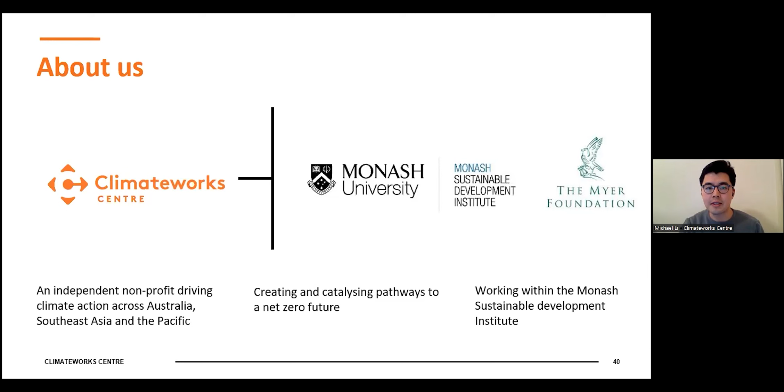Over the next half hour or so, I'll cover a discussion focused on the proposed changes to the National Construction Code for 2022, which will be announced and come into effect this year. We'll start with a discussion on why energy efficiency is important for buildings, an introduction to what the National Construction Code actually is, and what changes are being proposed for this year.

We'll also look at some of the research that we and Renew, and others, have shown about the impacts and benefits of introducing these changes to the National Construction Code for homeowners, and also what the impact is if these changes aren't adopted. Finally, I'm going to conclude with a discussion around the future aim for a zero emissions building code.

It's important to note that we will be covering the benefits and impacts from a householder perspective, because that's really what our research is focused on. The research I'll be presenting by Climateworks, as Graham mentioned, was completed in partnership with ASBEC, the Australian Sustainable Built Environment Council, and supported by their industry members. So it's a piece of research that has pretty widespread support in its development and presentation moving forwards.

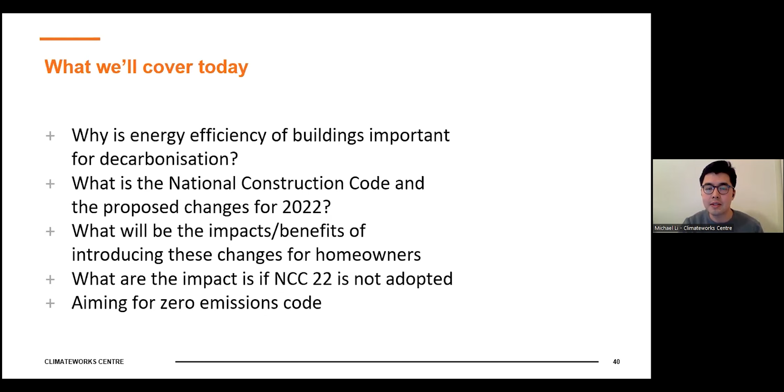So first of all, why are we even talking about buildings and decarbonisation? I'm sure it's not news to many of you on this call that buildings make a major contribution to both emissions and electricity consumption. Our research shows that buildings make up around a fifth to a quarter of Australia's national emissions. And in Australia, the building stock we have, particularly residential buildings, is pretty notorious for having some of the poorest quality energy performance in the developed world, especially when it comes to housing.

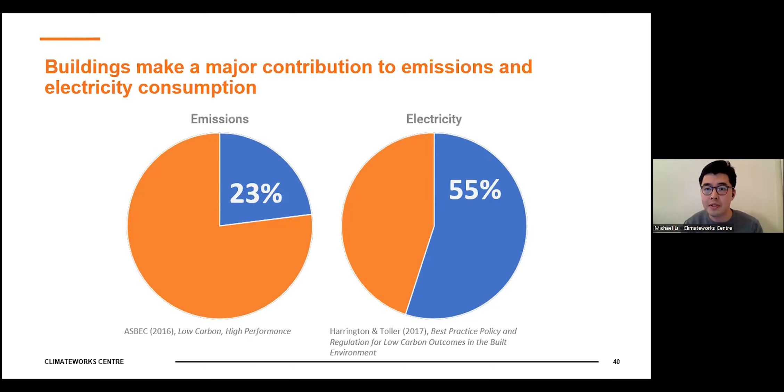Some examples of this include a study that Sustainability Victoria did a few years back, which showed that the average energy performance for houses built before 2005, before energy standards were introduced, was around 1.8 stars out of the maximum 10 stars available in the NatHERS rating scheme. For comparison, the current minimum standard for new housing construction is 6 stars. So there's a pretty big gap between what existed before the code, at 1.8 stars, and what's being built today at that 6-star level.

Even though this survey had some limitations, being based on a small selection and where the properties were located in Victoria, it does show that there is, based on this sample, a gap between existing homes and new homes being built in Victoria, where I'm based, but also across Australia.

When we look globally, the International Energy Agency did some analysis on energy efficiency for housing and found that during the period between 2000 and 2016, Australia was ranked 23rd in the improvement in energy efficiency for housing out of the 28 countries reviewed in that study.

On top of all that, as Graham mentioned, the energy standards for housing in the National Construction Code in Australia haven't been strengthened in over a decade. So not only are we falling behind our international peers, and not only are we starting from a pretty poor quality building stock, but regulation hasn't changed for a long time to allow Australian housing to catch up.

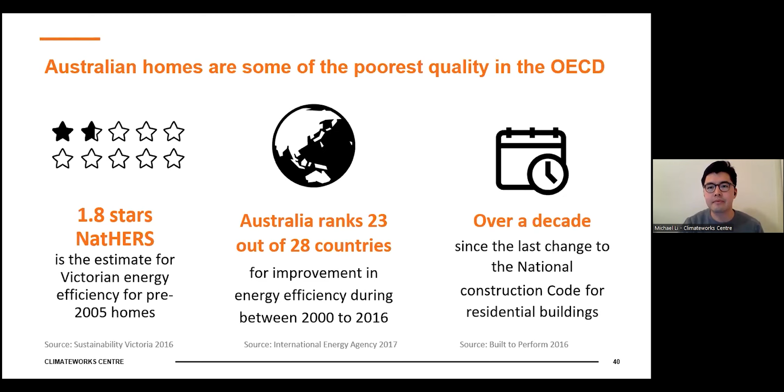What our research shows, and other people's research shows as well, is that many of the technologies and the practices required to reduce carbon emissions in buildings already exist and are readily available today.

It's commonly acknowledged that there are three very broad main ways to reduce carbon emissions from buildings. First is to improve energy efficiency, to reduce the energy being used in the first place. The second is to switch any non-electrical power sources and power demand to electricity, particularly from gas. And then finally is to produce and store energy on site at the property.

This can be achieved by a whole range of existing technologies and practices. Some of those are listed on the right-hand side of that slide there, and many of which I'm sure this audience is pretty familiar with.

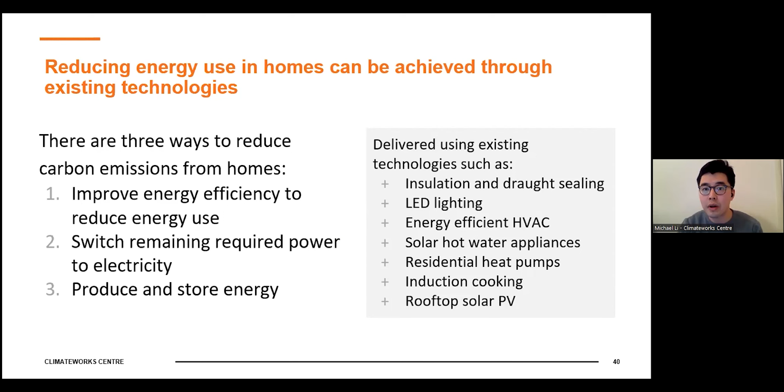But even though our research shows that these technologies and practices are available, the main challenge is how do we actually achieve widespread deployment of these practices over a very short period of time?

I'm sure you've heard in the news recently, but also over the last 6 months, that there's great urgency for the global community to reduce emissions in line with keeping global warming below 1.5 degrees above pre-industrial levels. Back in 2020, Climateworks released a report called Decarbonisation Futures, which calculated the changes in Australia's economy that need to happen by 2030

to keep climate change in line with that 1.5 degree target. So what our research showed is that under the 1.5 degree aligned scenario that we modeled, rooftop solar power generation doubled by 2030 compared to today's levels.

But it's important to note that the decarbonisation of the building stock isn't just about solar panels. Even in our scenarios where the electricity grid is powered by up to 79% renewable energy by 2030, so that's a pretty ambitious increase in renewable energy in the electricity grid, the energy performance or energy efficiency of housing would still need to improve by almost 50% by 2030 compared to today.

And in commercial buildings, that would need to improve by around 28%. Not only does the energy performance need to improve on top of the renewable energy expansion, but our scenarios also included a fairly significant amount of electrification.

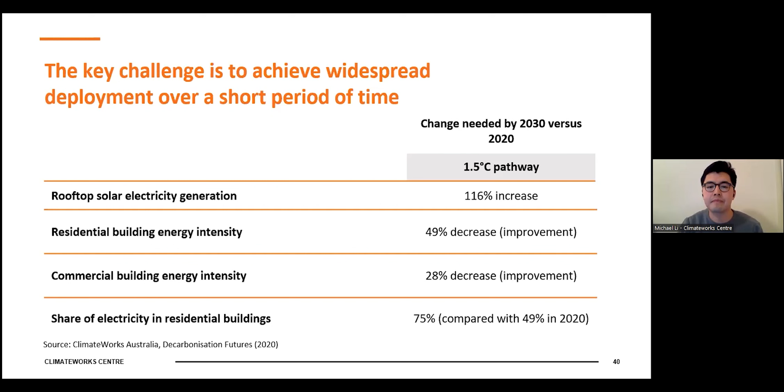So what does that look like when you break it down into different parts of our building stock? Well, if we focus on housing in particular, for new housing, our scenario that aligns with that 1.5 degree target includes an improvement in energy performance for new housing of between 51 and 56% compared to housing being built today. So what that suggests is that housing would need to be built significantly above today's minimum standards.

And then also for existing buildings, an improvement in energy performance of 41 to 44% compared to today's standards, compared to the building stock that we have today. So what that suggests is that not only do we need to be building more efficient new buildings, but we also need to rapidly accelerate the rate at which we retrofit our existing housing for better energy efficiency.

So really what that shows us is, what we know is Australia has targeted net zero emissions by 2050, a target announced late last year. But that target can't be achieved without a focus on both retrofitting existing buildings and a continued commitment to deliver more efficient new builds.

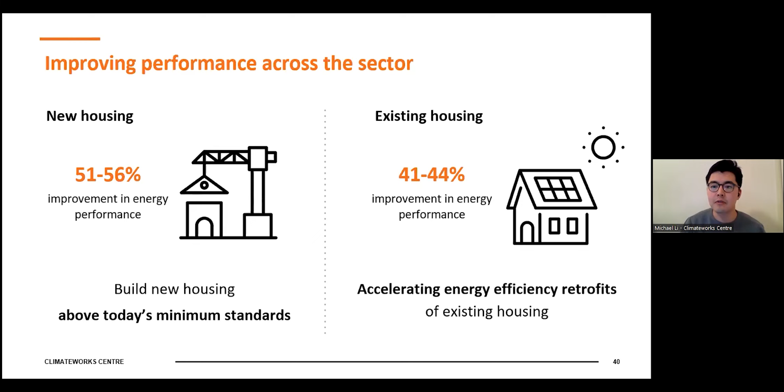And so this presentation will very much focus on new builds, and in particular, a regulatory policy, a regulation called the National Construction Code.

So new buildings and the performance of new buildings is really important for decarbonisation of housing and the building stock, because new construction does add up fast. We estimated that by 2050, about half of Australia's buildings that will be standing at that point haven't actually been built yet. So even though every year the proportion of new builds is quite small compared to the total building stock, that does add up over time.

The good news is that there is a ready-made regulatory mechanism for new buildings that governs the energy efficiency, performance, and minimum regulatory requirements for all new housing, which is the National Construction Code.

Back in 2019, the Council of Australian Government's Energy Council, essentially a group of all the energy ministers around Australia at the state, territory, and national level, agreed to a policy called the Trajectory for Low Energy Buildings, a national plan that sets a trajectory towards zero energy and carbon ready buildings for Australia. The plan recommended first setting a trajectory towards zero energy and carbon ready buildings, and secondly implementing cost-effective increases to the energy efficiency requirements in the National Construction Code starting from 2022, noting the policy was approved and published in 2019.

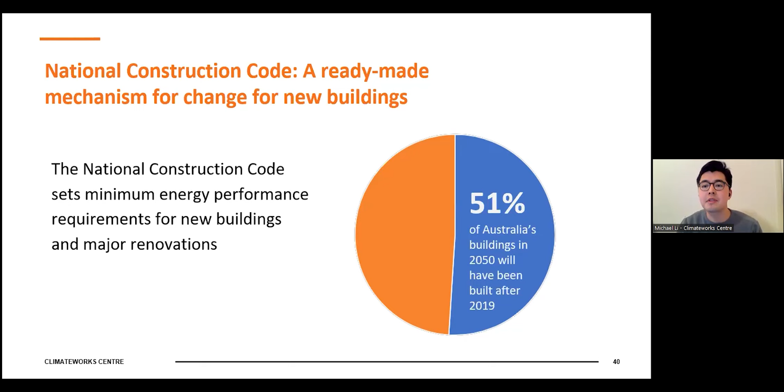Finally, to continue to focus on existing buildings, as I flagged before. The wording in that policy is an agreement to substantially update the minimum requirements in the National Construction Code from 2022, where it's cost effective.

One of the reasons why the National Construction Code is so important is not just because it already exists, which is very helpful, but also because minimum standards and stronger minimum standards allow everyone to enjoy the benefits of better energy performing buildings.

There are estimates that groups like the CSIRO have done that show only around 5% of residential buildings are currently being designed significantly above minimum standards for energy efficiency. What that shows is that even though it's not an insignificant chunk of the market building above minimum standards, 5% isn't nothing, 95% of the market for new housing every year is missing out on the benefits of high energy performance, which I'll go through based on research that Climateworks, Renew and others have done.

So if those energy efficiency requirements in the National Construction Code are strengthened, then those benefits are shared amongst all new houses and new apartments being built, and the people who are going to be living in those homes, not just those who choose to build above minimum standards.

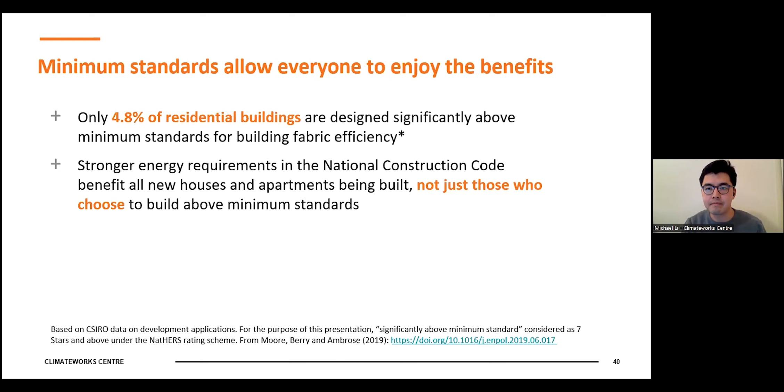Now, for those of you who have been following over time or have heard about the National Construction Code, you'll probably know that it is quite a tedious and dry process that we go through when it comes to these sorts of regulations. I've been working on this for years, and I can tell you from firsthand experience it is a very dry process.

So forgive me if you get a little confused when I talk about how the code is actually implemented, but it's important to understand the process by which that happens to really understand where the points of influence are, and the rationale for why we've done the work the way we have.

The way it's implemented is that there's a national body called the Australian Building Codes Board, which is responsible for drafting changes to the code, consulting on those changes to the National Construction Code, and conducting any analysis or modeling, like a regulatory impact statement, which is a cost benefit analysis of any proposed changes.

That national government body, the Australian Building Codes Board, drafts and writes those changes into a national construction code, a document they essentially pass on to the state and territory building and planning ministers. The reason is because the laws around building construction and new construction are actually implemented at the state and territory level.

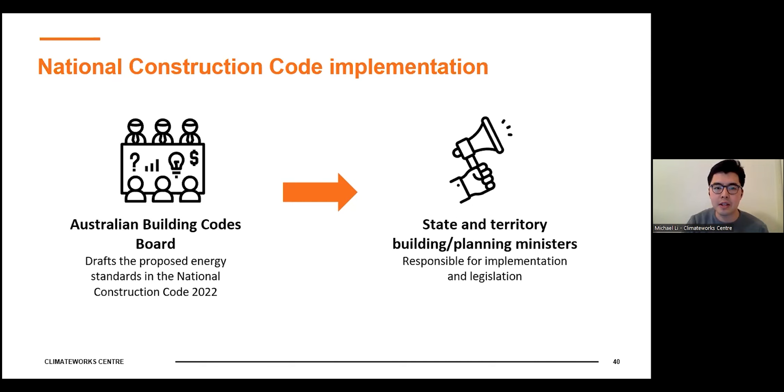So there's this whole kind of national and state and territory dynamic and process that the National Construction Code goes through to actually implement any of these changes that we've been doing the research on.

The reason we're presenting on this now is because these changes are currently being reviewed and considered by governments. Over the past six months or so, there's been a whole regulatory analysis process, and this has been a culmination of years of work by the Australian Building Codes Board and advisors and researchers in industry groups and organisations like Climateworks and Renew.

Where we are at now is that the new version, the proposed new version of the National Construction Code, is currently under review. It's a bit of a closed door process, so since the consultation that occurred over the second half of last year, even Climateworks, we haven't actually really had visibility over what the specific changes are.

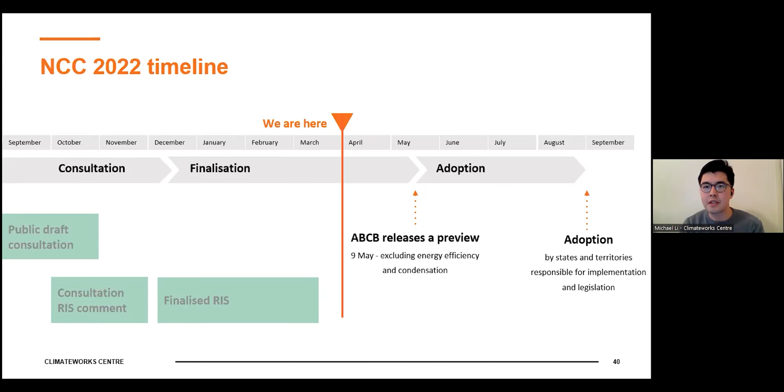Later in this year, starting from May and then across the following couple of months, the state, territory, building and planning ministers will make a decision on what changes they will approve, what changes they will actually implement, and whether they stick with the national consistent standard for the National Construction Code, or potentially vary for their own jurisdiction. So it's a watch-this-space status at the moment.

Some of the changes being proposed relating to energy efficiency of housing in the code include three main changes that I'll go through. There's lots more, actually, but I'll talk through the three most high-level ones.

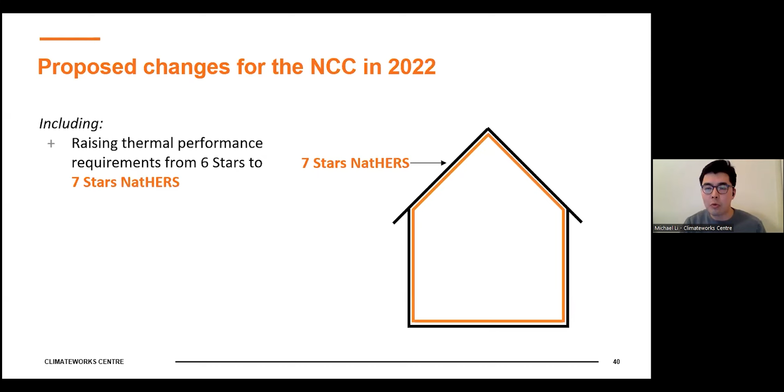First of all, raising the thermal performance requirements from 6 stars to 7 stars under the NatHERS scheme. That scheme refers to the building fabric, so things like insulation, windows, shading, orientation, and the energy requirements for heating and cooling. That requirement will upgrade from 6 to 7 stars under that scheme.

Secondly, the Australian Building Codes Board is proposing to introduce what is commonly called an energy budget, which is essentially a budget for the maximum allowable energy that a home can use over the course of a year. This energy budget covers heating, cooling, lighting, and hot water, and there is an option for renewable energy as well.

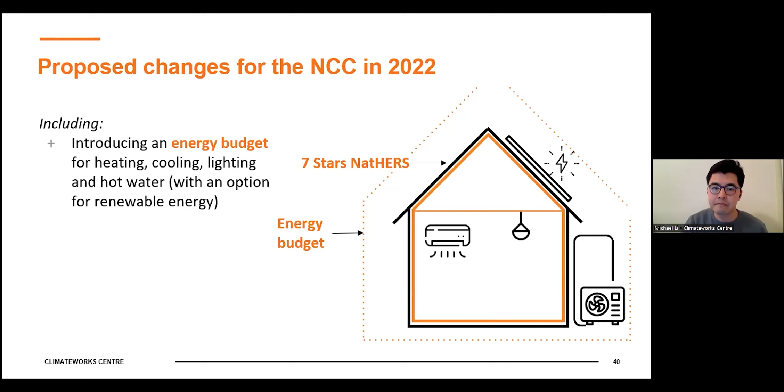Finally, the third change is that it's proposed to include a requirement for apartments and commercial buildings to have the electrical infrastructure - the wiring, the distribution boards - available and installed with enough capacity to allow for the future retrofitting of renewable energy systems and also electric vehicle charging.

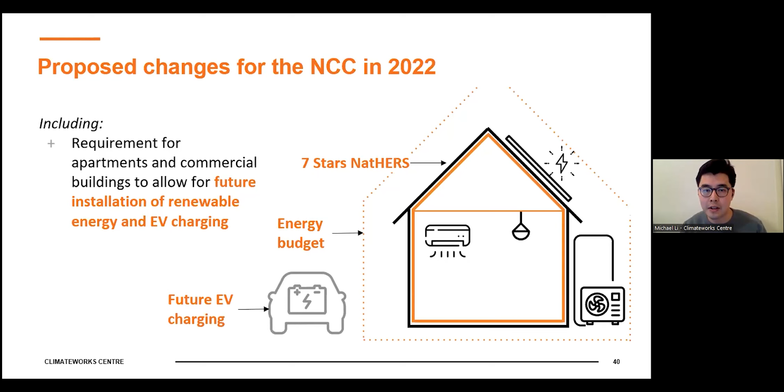Importantly, the code isn't proposed to actually mandate electric vehicle chargers, for example, but for apartments and commercial buildings, if this proposal goes through, it will require the electrical equipment in those buildings to have enough capacity to allow for the significantly higher electrical demand that's going to come from electric vehicle charging.

Now, to confuse and muddy the waters a little bit more, the Australian Building Codes Board has actually proposed two different options for how these three high-level changes are going to be implemented. Again, because we haven't had visibility over those changes over the past 6 months or so, we don't know which option the code is likely to go down.

But just so you get an idea about the level of ambition being talked about here, there are two options, option A and option B. Option A is essentially, for want of a better word, a less ambitious option when it comes to strengthened energy improvement. It allows for a higher energy budget, meaning more energy can be used over the course of the year, which is a lower energy performance.

Also, option A doesn't allow for any on-site renewables to help make up or meet that budget. Whereas option B requires higher energy performance than option A because it has a lower energy budget, and it actually provides a slightly more flexible approach to meeting that tighter energy budget because it allows for an option to install on-site renewables to help meet that budget.

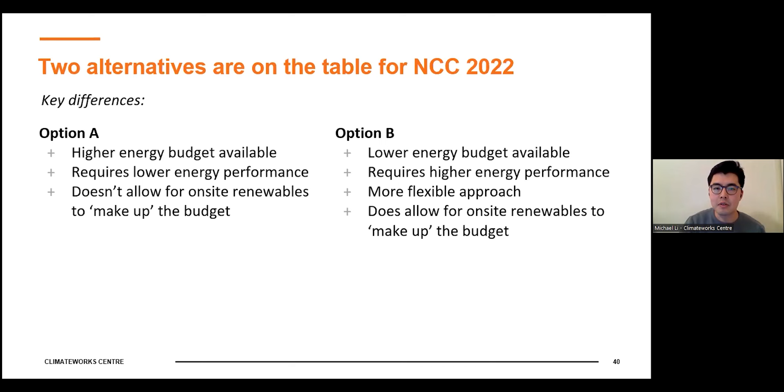There is still going to be a minimum requirement for energy efficiency, so renewable energy wouldn't be a trade-off against a minimum baseline energy efficiency requirement. But it does allow for flexibility to meet that tight energy budget, either through on-site renewables or potentially through better energy efficiency or electrification as well. So it gives builders and designers the option to use their judgment for what's actually going to work for the site and for that building.

Now, onto what the research says about the benefits of these changes and why we, as Climateworks and so many other organisations, are supporting these changes. You might have heard that the ABCB, the Australian Building Codes Board, did some economic analysis on the proposed changes. They found that when considered at the societal level, so not at the household level but what it means for the whole of Australian society and economy, the costs of strengthening the code would outweigh the benefits. So at a societal level, the changes would not be cost beneficial.

And there's a whole range of reasons. I guess Climateworks' position and others' position is that there's a whole bunch of reasons why the assumptions made in the economic analysis skew it towards an unfavorable outcome, which are not consistent with the research that we and many other organizations have done.

But if we put aside the societal result for a moment, that analysis published by the ABCB did actually show that when considered at the household level, the benefits do outweigh the cost. So it actually is cost effective. For the vast majority of the cases modelled through this report, commissioned by the ABCB, the change from 6 to 7 stars for thermal energy performance, the heating and cooling energy performance, is actually cost effective for the vast majority of cases modelled.

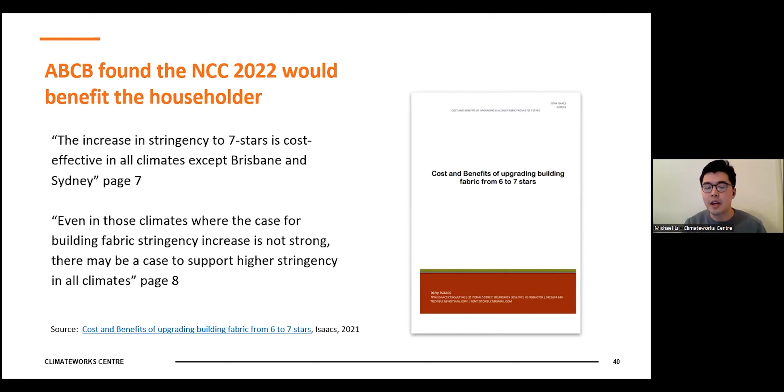But even if they're not technically cost effective from a cost benefit analysis, the report still makes the case for higher stringency, higher energy performance in all climates for a variety of reasons, which include things like the impact on household cash flow over time, the longevity of buildings, the fact that emissions are going to be locked in, and all the benefits to do with comfort, resilience, lower stress on the electricity grids. There's a whole range of reasons beyond just the benefit cost analysis for why you would want to introduce those standards. But importantly, what it shows is that at the household level, for the vast majority of cases, the benefits outweigh the costs. This is the ABCB's commissioned analysis.

And this is backed up by our independent research, the research that we undertook back in 2018, before these policies I mentioned were actually announced, which showed that cost-effective changes to the National Construction Code can save hundreds of dollars a year in energy bills, adding up to $29 billion in residential and non-residential energy bills between now and 2050.

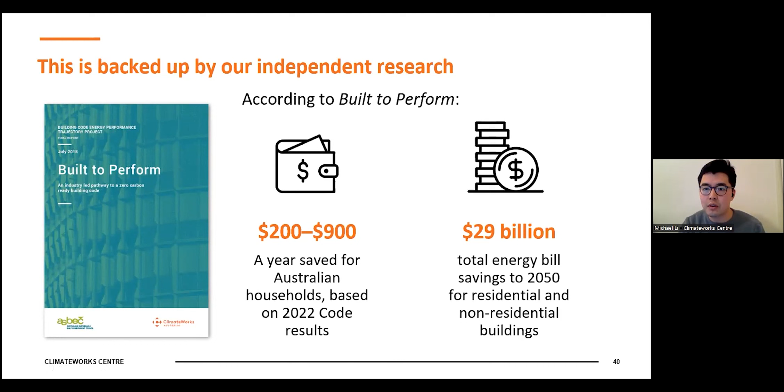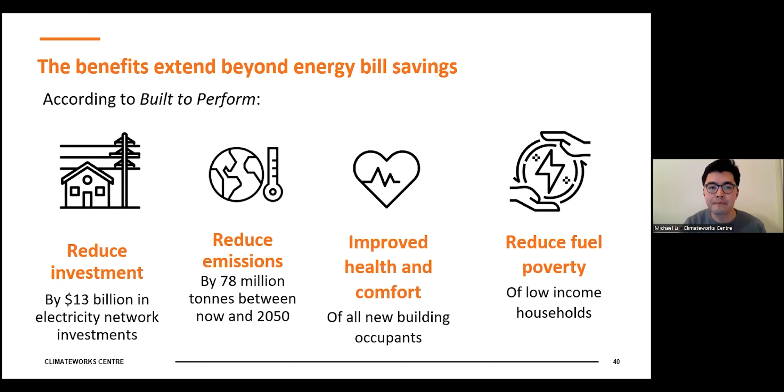So I was just talking about the next slide, I just realized. What our research showed as well back in 2018 was that we can't afford to delay these changes to the code.

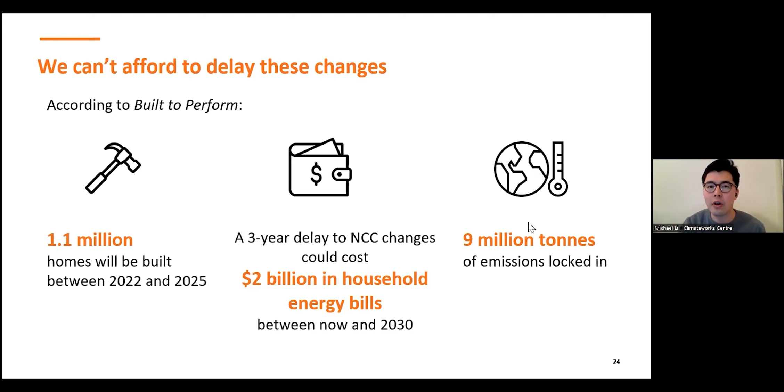Our analysis estimated that a bit over 1 million homes will be built between 2022 and 2025. And over that 3-year period, if the National Construction Code isn't updated in 2022, and instead delayed to 2025, that can lock in billions of dollars in household energy bills that otherwise don't need to be incurred, and 9 million tonnes of emissions between now and 2030 that could have been cost effectively reduced through this change in the code, but instead have to be abated either through retrofitting existing building stock or in other parts of the economy, like transport or heavy industry, where it's less cost effective to do so.

Finally, I'm going to step ahead, thinking beyond the changes to the code this year, which, as I mentioned before, are currently in train. They're currently being reviewed, and the decisions are currently being made by the relevant decision makers in government.

One of the other reasons why we support the proposed changes to the code this year is that making this change, which represents the first change in household energy requirements in the code for over a decade - something like 12 or 13 years since the last change - actually lays the groundwork for a zero emissions building code in the future.

Our research in the Built to Perform report that I mentioned before, back in 2018, showed that even higher energy efficiency than what's being proposed for the 2022 code can be achieved with net benefits to households and net benefits to society.

On this basis, our position is that governments should adopt the changes that are being proposed and almost finalized for the 2022 code with minimal delay, with a plan to set the building code up for changes that are aligned with net zero emissions - a zero emissions or zero carbon ready building code in 2025. That's all to do with the urgency of climate action.

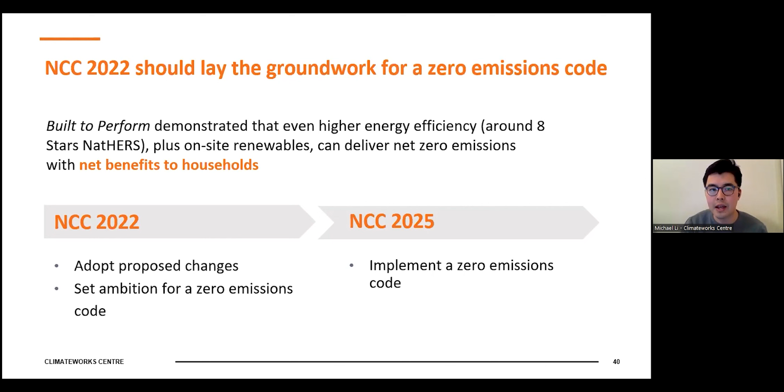So just to summarize some of the key takeaways: as we've seen, the building standards we have here and the energy performance of our housing are lagging behind international peers. Stronger energy performance standards mean lower energy bills and improved health and comfort for all new housing, not just those who choose to build above current regulatory standards.

The solutions to decarbonise buildings are ready and cost effective. Not implementing those solutions now, and not implementing this change to the code now, means we'll have to invest a lot more in things like energy efficiency, the electricity grid, and other emissions reduction measures that are probably not going to be as cost effective.

Just flagging again that while the step from 6 to 7 stars being proposed for the 2022 National Construction Code isn't at the same level as what our independent research has found to be cost effective, adopting that will hopefully set us up for a zero carbon aligned building code in 2025.